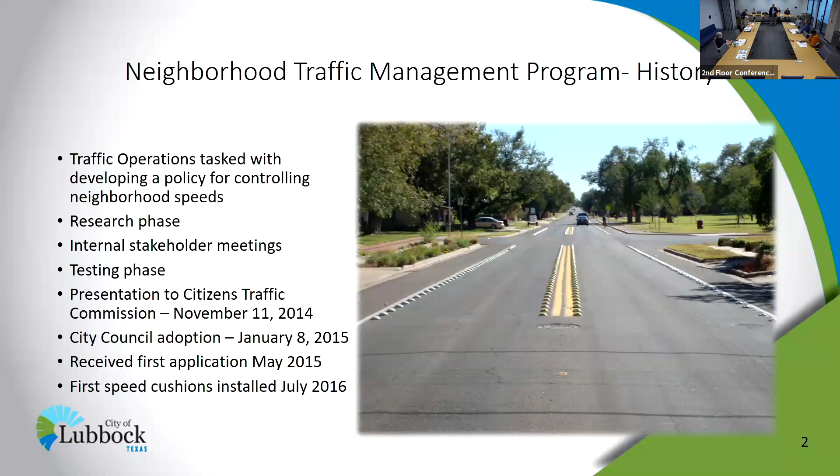It's an extensive packet. It's not just speed cushions. It's a variety of different tools that we can install for both neighborhood streets, alleys, and then also arterial and collector type streets. We received our first application for the program in 2015, and actually did our first speed cushion install in July of 2016.

So we talked a little about traffic calming devices. What is a traffic calming device? We consider that a device that's a physical object that self-enforces a certain driver behavior. If you think of a median in your way, it will prevent you from turning, whereas if you just place a sign in a spot, you're still physically allowed to turn, but just advised not to. So we were looking for physical objects that would deter speeds. Something that would not inflict damage to vehicles, and something that also allows drivers to maintain control.

So in other words, you don't want to put a normal speed bump like you would see in some of the parking lots around town. We all have a parking lot where there's a speed bump that's kind of harsh to drive over and would be impossible to do at a normal speed going down a residential street. So we wanted something that would allow drivers to maintain control so they're not swerving wildly and present other issues to us.

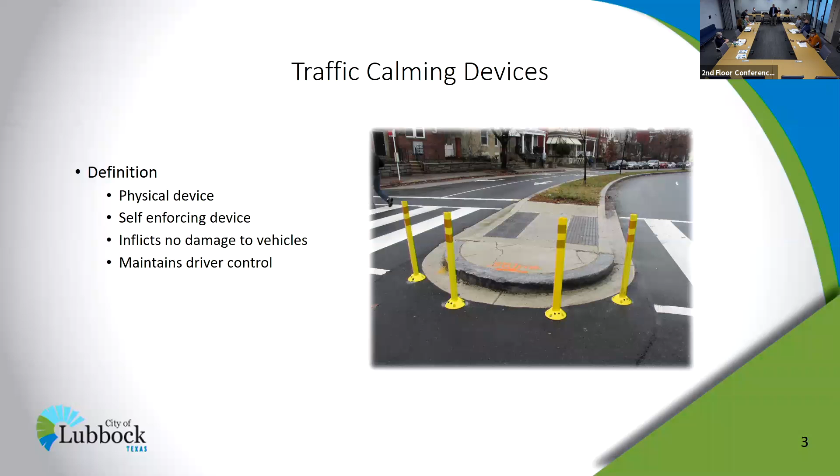So we settled in on, like I said, really 3 different areas of concern: alleys, neighborhood streets, and then collectors and arterials. For the next several slides, I'm going to go through and show you what our program offers for each of those scenarios. So for alleys, all we offer are speed bumps. This is a prefabricated device that we order and just bolt down to an alley. It has to be a concrete alley, which is where we have the issues with speeding typically. If you have a dirt alley, usually the nature of the alley maintains speeds on its own.

So it's pre-constructed from recycled rubber. It's a really hard material. We try to install them 300 to 600 feet apart. That depends on where dumpsters are, where possible access to driveways exists, and that sort of thing. So sometimes that range isn't completely met. That's what we strive for, though. These devices work, as you can think of going over in parking lots where you have a speed bump, people slow down. They have a great cost to benefit ratio. They're very effective in slowing down traffic. We've actually installed these in 2 different alleys currently.

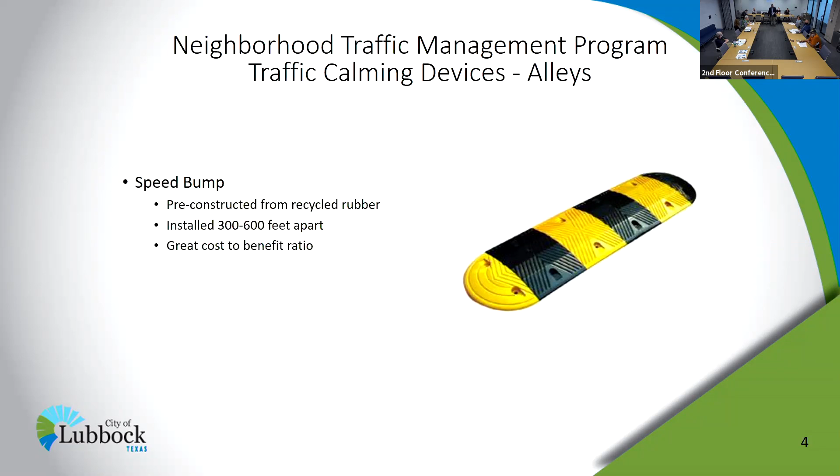Next we have these devices that help maintain speeds on residential streets. These are available to streets that have houses that front them, so not the sides of houses, within neighborhoods. The first one I'm going to talk about is a speed cushion. This is actually a picture from 13th Street west of Quaker. This was one of the very first installs we did. As you can see, it's not like you may have seen in other cities where we have speed cushion all the way across the road. It is in sections, but they're installed in such a way that they can't be avoided.

The sections help both with cost, but also they help out aspects of the street, such as street water flow, drainage. The large fire trucks and large vehicles can actually straddle them. A normal car, if you try to go between them, you get a tire on one side or the other. So they're very effective in slowing down speed. The way we install them with sections, bicycles and pedestrians, possibly joggers, can easily get around them. And similar to the speed bumps, they have a great cost to benefit ratio.

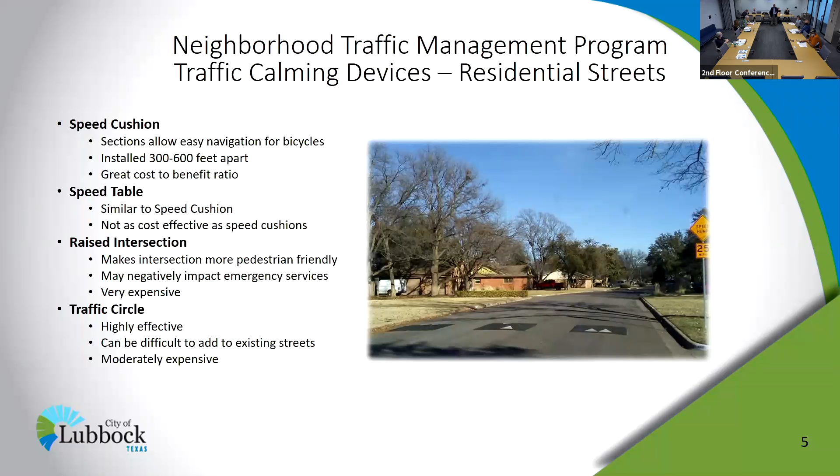There's a short flat section at the top. So that's what allows vehicles to go a normal speed down a residential street. So going back to the speed tables, again, they're very similar to a speed cushion, just a wider flat portion at the top. They're not as cost effective as speed cushions. They do the job about as well based on other cities' data, but they are more expensive than speed cushions. So really, speed cushion, in my opinion, is a better option just because we can put more out there for the same cost.

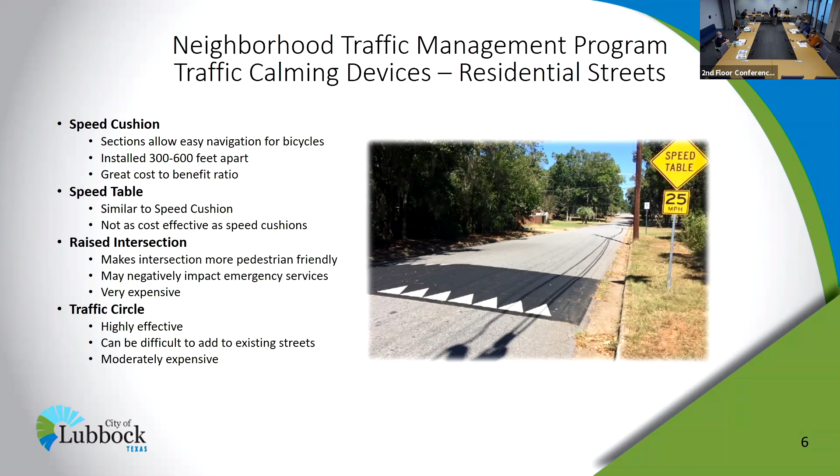It can negatively impact emergency services. In other words, they can't straddle this. They're going to go over it one way or another. It's going to slow them down. So another point is they are very costly. So this is an option we have in our packet, but we do not have any of these installed.

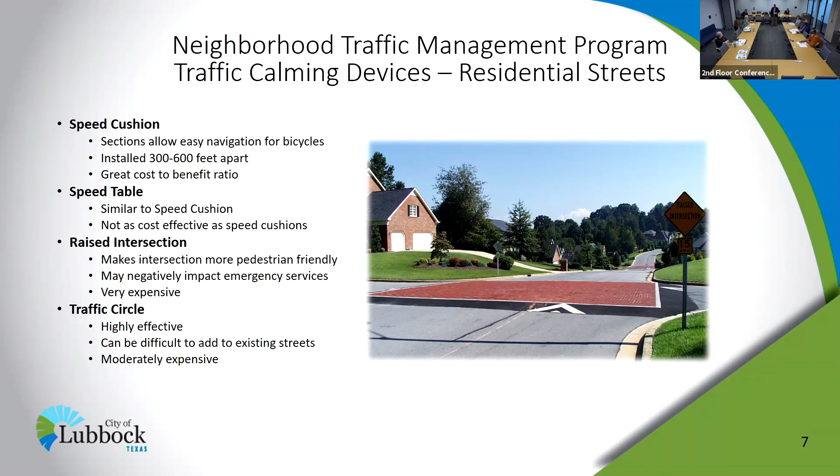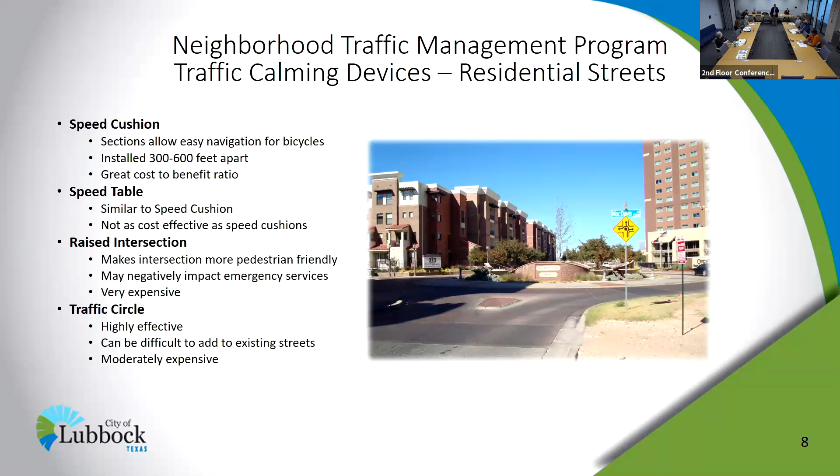They can be difficult to retrofit existing intersections just because if you look at the geometry of this, the corners have been shaped in such a way that allows traffic to smoothly go around it. And in a normal neighborhood, that would require land acquisition, that sort of thing. So it's not always easy to retrofit. It can be done, not always easy. And depending on the size, shape, and design, they can be moderately expensive.

So next, we're going to look at our options for collector and arterial streets. And so we use the word collector street in many different ways in our department, and in these meetings, I know we've talked about collector streets in the past. As our packet terms collector streets, it's a street within a neighborhood that has houses whose sides butt up to the street. So typically around town, those are going to be north-south collectors. Not always the case, but just in a typical neighborhood, that's what it is.

So the first option we have for these sorts of streets is a median. We're all familiar with medians. They may result in the reduction of speed and traffic noise. Usually speed and noise are coupled together as we think about it in a neighborhood. The way that they reduce speed is they narrow the lanes. And so it feels more narrow for a vehicle, so it typically slows down speeds.

Similar to traffic circles, the effectiveness of these devices depends on the design. So we've seen them installed all around town, anywhere from 15 to 20 feet wide or greater, down to 12 to 18 inches wide. And the effectiveness depends on the length of the median as well. So they come in all different sizes and options.

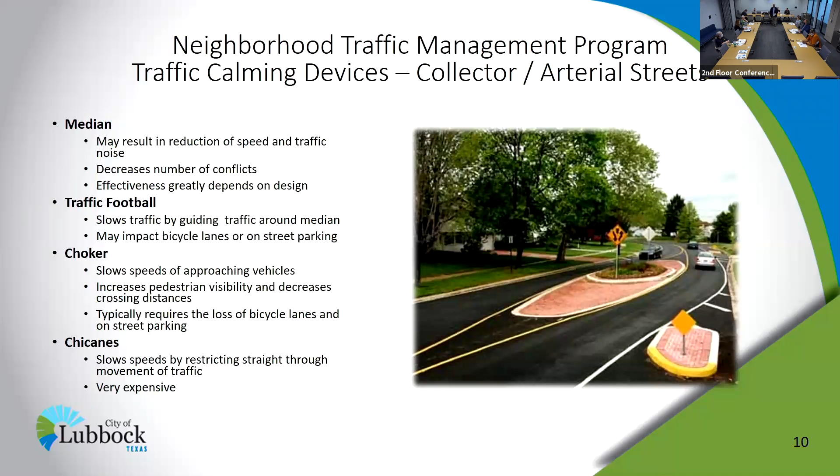Next, we're looking at a traffic football, is what this is called. Probably see why it's called a football. So this is essentially a median that doesn't extend very far. So it's a shaped median. It slows traffic by just guiding it around the football, if you will. Again, it slows traffic down by narrowing the width of the lanes. And it also makes the driver deflect, curve just a little as they go around it. We don't have anything that I would call a traffic football installed in town, but it is an option in our packet.

Another device that narrows the lanes is called a choker. So these are devices that are not installed for the full length of the street, just sections that narrow down the lanes again. Instead of putting them in the middle of the street, we put them on the sides. Definitely slows down vehicles. The negative aspects of putting something on the sides of the street is that it can take away bicycle lanes, possible parking options, that sort of thing.

It does increase pedestrian visibility. So in other words, if you can picture a pedestrian in this, for example for pedestrian crossing, because there are no ramps, but if there was a pedestrian there, the pedestrian would be in front of a driver approaching the section that sticks out in the roadway. So the driver would see a pedestrian a little easier. And it also decreases the amount of street width the pedestrian has to cross. So it's safer for pedestrians for a couple of reasons.

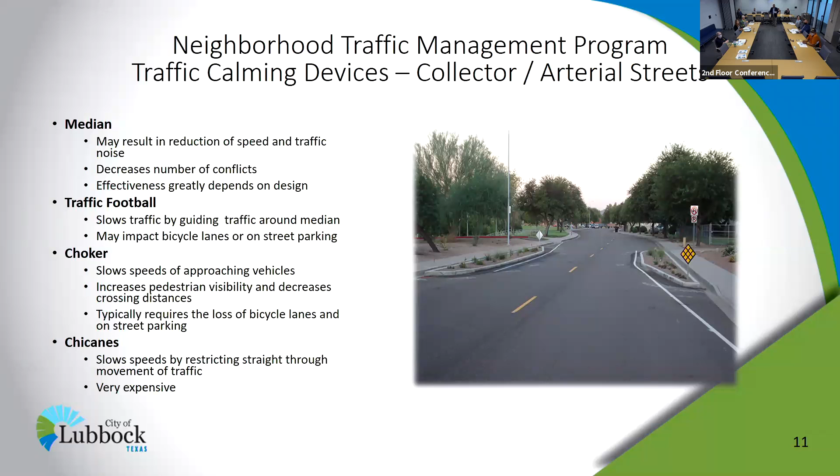Next, we're going to talk about chicanes. So a chicane basically is a device that makes a street snake. It slows down vehicles by making them turn every now and then. So they're little small curves installed into a street. These devices are more effective installed with development. So in other words, on the front end as a street is being created, if you create a street that curves, you can usually have more control as far as the amount of curvature, and it's just a better setup than installing something like this out into the street.

So these can be very expensive. If you think of a choker or a traffic football type installation, that's just in one spot. This continues for a segment, for a stretch of road. So it can be costly depending on the design.

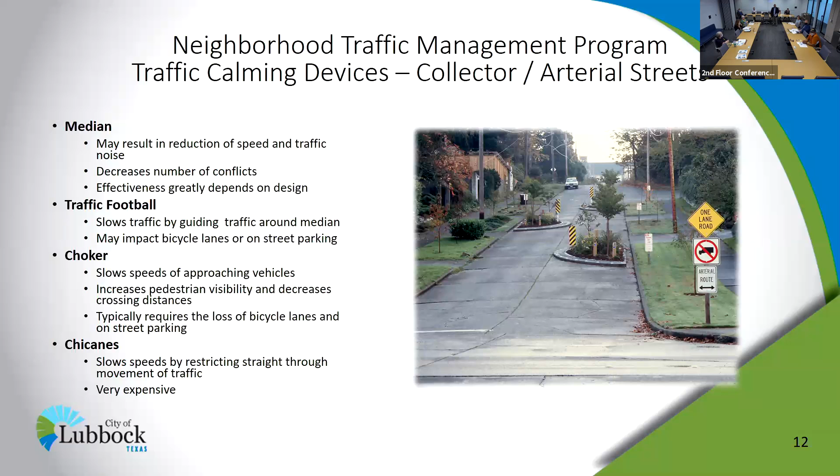Next, we're talking about diverters, or what you call a half closure. So basically, this is just a median that cuts across an intersection catty corner, forcing traffic to turn at the intersection. It decreases the number of conflict points because folks are not turning in front of straight through traffic. And it can increase pedestrian safety. Not in this picture, but if designed correctly, it gives them a spot to cross in the middle of the intersection. Again, it restricts through traffic, which means it could increase travel times, which again may negatively impact emergency services.

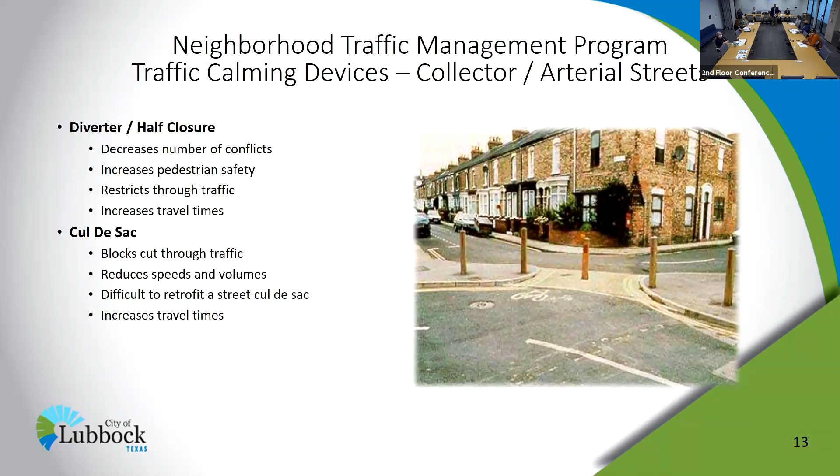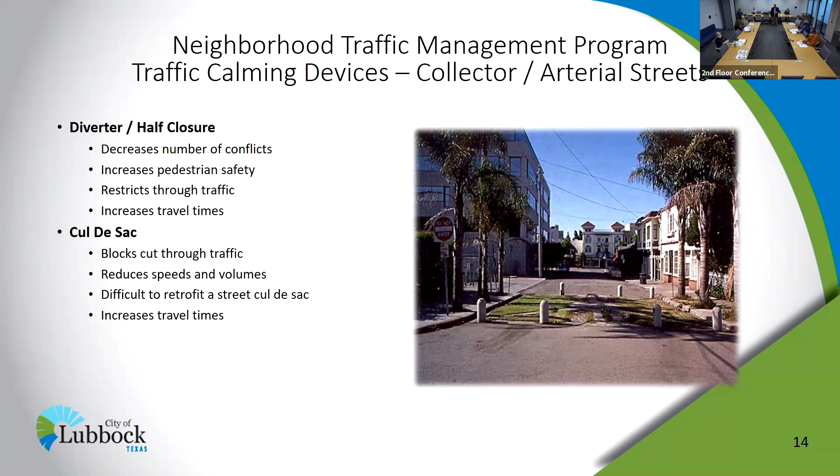So those are diverters. And then next we have a cul-de-sac. Everybody knows what a cul-de-sac is. It blocks through traffic, similar to a diverter. Definitely reduces speeds and volumes. It's difficult to retrofit an existing street with a cul-de-sac. When a cul-de-sac is normally designed, there's a radius that goes onto what would normally be private property in an existing street setup. So it's difficult to design a cul-de-sac after the street's already been built. And again, by blocking cut-through traffic, it does increase travel times.

So those are the different devices we offer as a part of the program. Again, really at this point, we've only installed two of those just because we focused on the neighborhoods, which was the main purpose of this. We wanted to give the toolbox for many different streets, but focus on neighborhood speeds, which is where most of our citizen requests about speeding come from.

So what is the process involved to get something like a speed cushion or a speed bump installed? Like I said, we have the neighborhood traffic management program. This is a packet we have online that we frequently mail and email to folks that have questions about the program. Now that we have several installations out there, people see them driving around and think, hey, how can I get that installed on my street? So news is kind of getting out. The number of requests has definitely picked up as we progress through the years. To get it started, there's a short application somebody would have to fill out that basically just addresses their contact information and the area of concern.

Once we receive that, we do a speed study on that section of roadway. We'll put the rubber count tubes out there, we set them out for a 24-hour period, we collect them, and we collect the 85th percentile speeds from those devices. Going back to other meetings in the past, we set speed limits with information such as the 85th percentile, so that's why that's important in this case. If the 85th percentile speeds in either direction are above 35 miles an hour, the city views that as a speeding issue on a residential street where speed limits are 30 miles an hour. If that is the case, the street is eligible for city funding of possible speed cushions.

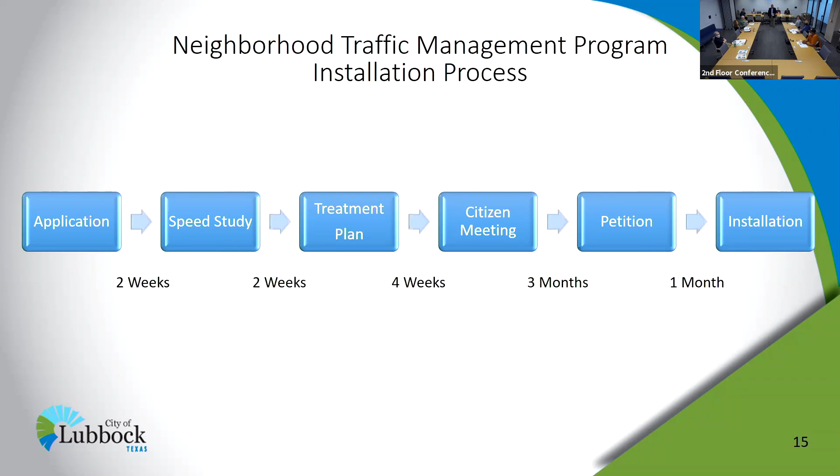And to clarify, 58th Street, this section is between Indiana and Memphis. There were a lot of vehicles, there still are a lot of vehicles that use that street. So when we get calls, most people who have seen them see them on 58th Street. It's a highly visible section of roadway. So yeah, we've done a great job at dropping speeds and volumes.

It's hard to know for sure. Our speculation is the vehicles that are not using that are cut-through traffic. Typically cut-through traffic speeds because they're going to the other side of the neighborhood. They don't live on that street. So we're accomplishing two things there. They're both positive.

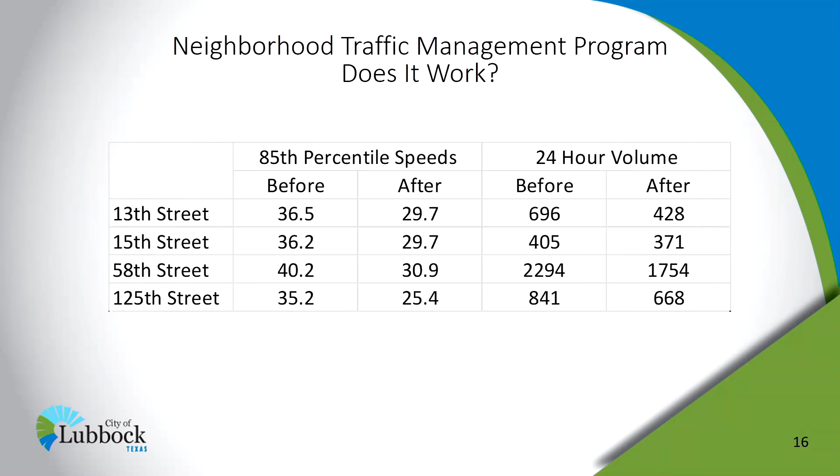That device is in the appendix. But yeah, definitely. I'd be interested to see what speeds we are seeing there. Yeah, I'm just curious. I didn't know if these were done. Like I said, right after you put them in, they were great. I mean, they're still great. I think over a prolonged period people are getting used to them, and now speeds are back up and they're just flying over them like they're not even there. All right, well, thank you.

So, 5 years into the program, what are some lessons we've learned? It's easy to do your research on the front end and think this is perfect, we're going to move forward. After you use it for a little while, you see some ways we can make it better. One of the things I've identified is to decrease the number of options available. Raised intersections and speed tables are both costly options that are similar to traffic circles and speed cushions. We have traffic circles and speed cushions implemented both by development and after the fact by various departments throughout the city. So why not just focus on those? If a raised intersection is too costly to install, maybe we should remove it from the package.

Another thing I'd like to look into is to better define residential streets. On the front end, the definition of a residential street was a home in a neighborhood that fronts that street. And if the side of the home was to the street, as you'll recall, that's what we termed a collector street. What we didn't anticipate is streets that have homes that both front and side to it, and we've stumbled across several. So, create a better definition of a residential street as it relates to these speed devices.

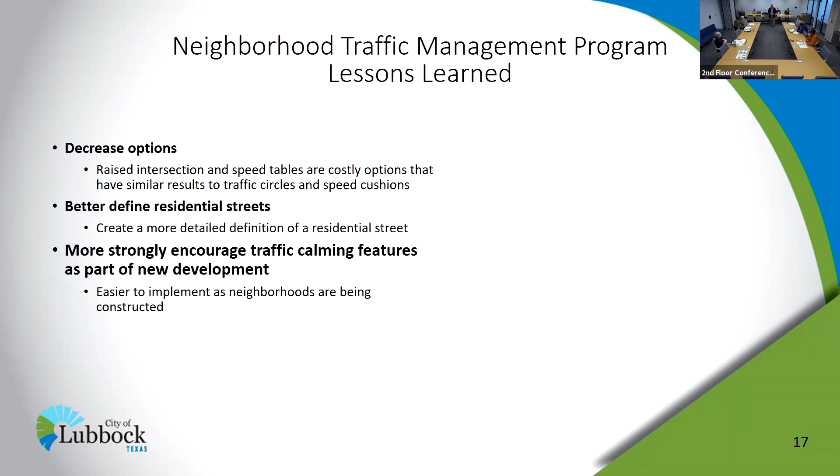And also, like you mentioned earlier, we want to more strongly encourage traffic calming features as part of development. That's definitely a time to address it. It's easier to implement, it's cheaper to implement, and it typically makes the neighborhood more appealing to residents if you can build a neighborhood where speeds are under control. So that's something we'd like to push a little stronger. With that, do you have any questions? Hopefully that was a plethora of information as promised by Charlene. Great information.

One thing I was going to mention, and David can go into it more, is that we plan to bring our revised NTMP back to this group. Did you already mention that? I did not. Probably in October, maybe November, and then take it back to City Council to be reapproved with a few changes that you would approve. So that's the time frame. Any other questions? I know that wasn't a question.

I have one question. It's kind of a chicken or the egg question. How often does a person put an application in, you do all your studies, and then the majority of the neighborhood says no, we absolutely don't want that, and you spent all that time? Do you ask when they apply whether they've spoken with any of their neighbors, whether there's any discussion within the neighborhood, to save you time if you knew beforehand that people wanted it? But then you don't know if it's going to be effective until you go out and do the study. Mm-hmm.

So, we have had those situations. And it's our train of thought that we continue through the steps and see how it turns out, because it does take staff time. However, we don't want to be the ones to deny it.

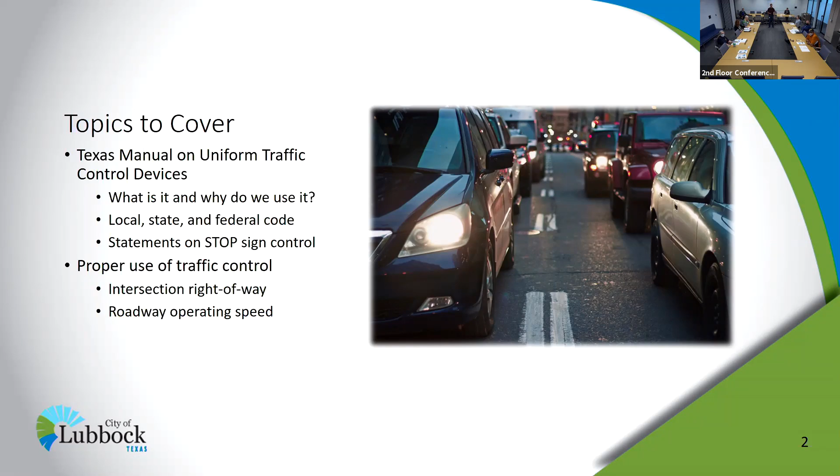And then we'll talk about the proper use of traffic control, such as at intersections to assign right of way, or in those sections of roadway that are not at an intersection where you see the operating speeds. So this is the TMUTCD. This is the Texas version of the federal MUTCD. So there are about 7 or 8 states that adopt a state version of the federal manual. The rest of the states just adopt the federal manual.

Really the differences are pretty minor. Texas takes out a lot of stuff that's in the federal manual and then adds a little bit. California adds a ton of stuff that's not in the federal manual. But basically you have to just generally comply with the federal manual, but you're allowed to make some changes here and there. This guides engineers in the proper application of traffic control devices. We'll get into why that's important.

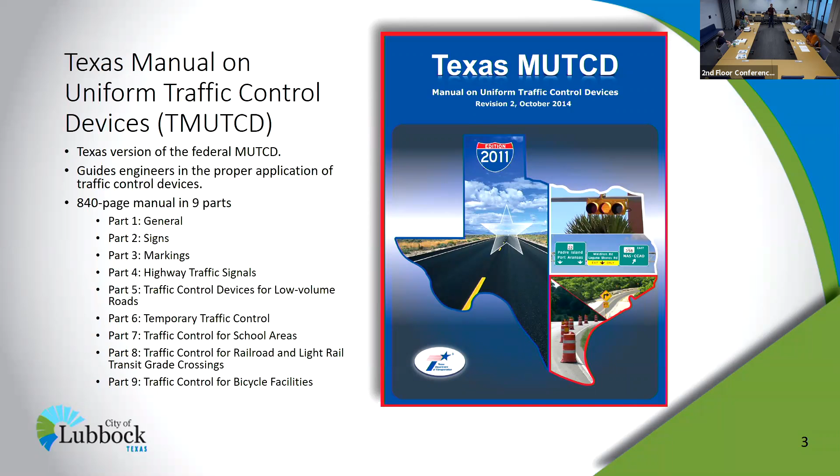And then it's an 840-page manual in 9 parts. So not a real good read. If you have insomnia, it's pretty good for that. But we'll be talking about part 2, signs, because that's where stop signs are. But this also helps us in all other applications of traffic control devices, such as signals, rail crossings, that sort of thing. Temporary traffic control, that's big.

A little bit of the history of the MUTCD. So this was not some federal mandate that just came about in the last 10 years or 20 years. It actually started in the early 1900s. So the first center line was painted in Michigan in 1911, and then the first traffic signal in 1914, first stop sign, 1915, and then the first official route signs as a part of a maintenance function, 1918,

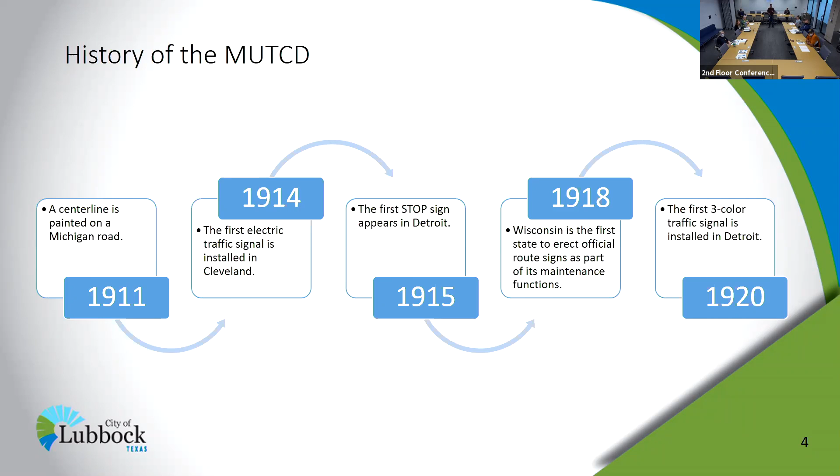three-color traffic signal, 1920, and then post-World War I, World War II, when the country really started becoming mobile, you started seeing a lot of motoring groups and state and federal groups get together and say, we need to make this uniform so that if I drive from Texas to Nebraska, I don't see 10 different shapes of signs and 10 different colors of signs that all mean the same thing. And so the federal MUTCD was born in 1935 as a 166-page 4-part manual. So it has grown quite a bit since then.

So AASHTO, which is the American Association of State Highway and Transportation Officials, they are a big proponent of having uniform traffic control devices and uniform design throughout the country. And that way, as you drive from city to city, county to county, state to state, you expect that a speed limit sign is always a white rectangle with black text, that sort of thing. So why do we use it? Well, we just talked about that. Uniformity of traffic control devices ensures road users can travel between cities, states, and regions with ease.

The MUTCD standards are based on research, which is applied across the nation through Federal Highway. So before anything makes it in the manual, they test it. They don't test it in one city or two cities. They usually test it in tens of cities. And then there's an experimentation process that is formalized that if you want to try a new device out and it's never been in the manual before, you have to actually appeal to Federal Highway, and then it is a research-driven process. So there's before and after studies.

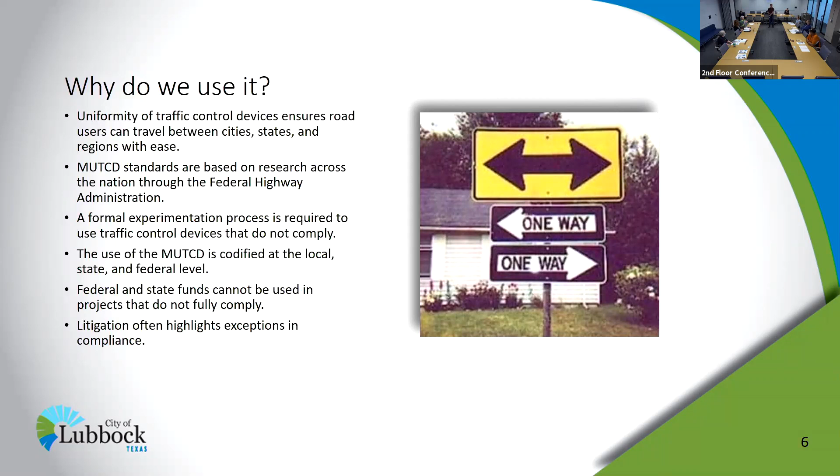And then another big thing is litigation often highlights exceptions in compliance. So if you have a major crash or you have a major incident, lawyers are going to be looking to see, did you apply the manual properly? Did you comply with all of the state and federal guidelines that are codified?

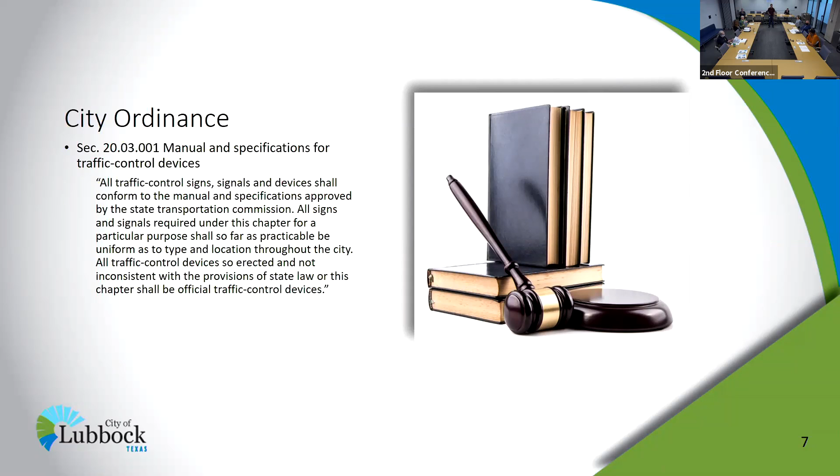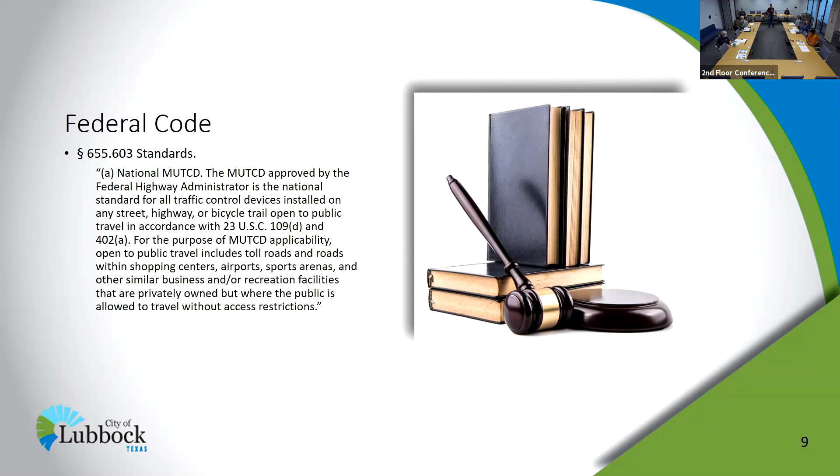So this is a city ordinance that has adopted a manual for specifications for traffic control devices. I'm not going to read all of these. I just want to let you know that it exists and it is in our code. And same thing for the state code. It's a little longer because it's the state level. And then same thing in federal code. So the federal is the only one that mentions the actual MUTCD. The other ones talk about a manual developed by AASHTO, but AASHTO has formally adopted MUTCD, so it's still codified.

Guidance, options, and support are lower level statements, but guidance is still the most restrictive non-standardized language. So basically, if it's in a guidance statement, you should do it unless you have a really good reason not to do it based on an engineering study or an engineering judgment. Most of the application of stop signs is guidance, but unless we go do a formal study that says, well, we can do an exception here, we should follow guidance.

Options and support are a little more open-ended. They just kind of tell you, here's different ways you can do things. Here's your different ways that you're allowed to put something or not something. Options are, it's kind of self-explanatory. You don't always have to put up something.

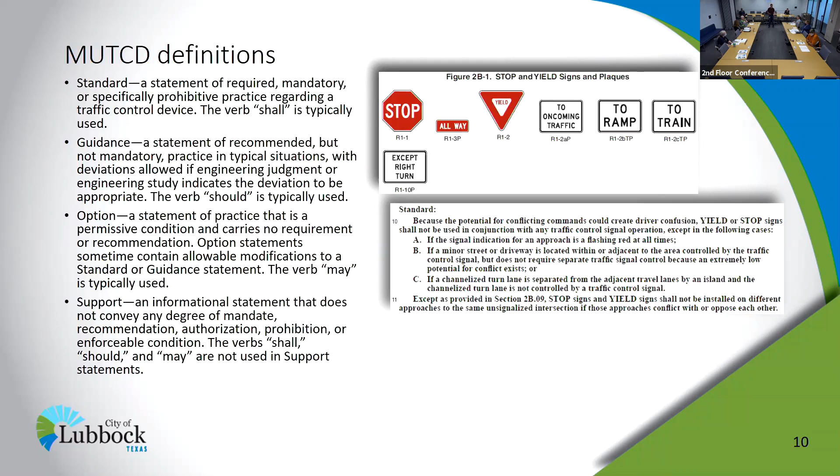So that tells me right away the manual doesn't want me to make people stop unnecessarily. It wants to keep traffic flowing, and it wants the necessary stops to be easy to see and easy to recognize. If I put a stop sign at every single intersection down the street, it's going to be really difficult for the driver to tell which ones of those have a high hazard and which ones of those are just like, well, maybe they're trying to slow me down. So that is why we don't use stop signs for speed control. We want the hazard or the situation that requires a full stop to be readily visible to the driver.

So if you can't see down the road, like a lot of the intersections downtown where you see an all-way stop, it's because you physically can't see down the road to see if someone's coming. So we stop all the vehicles coming into the intersection, and that way it's safe. And then crash records are kind of a reactive measure. If every year when we look at crashes we see a lot of crashes happening in the intersection, we're like, well, maybe we need to put some stop signs.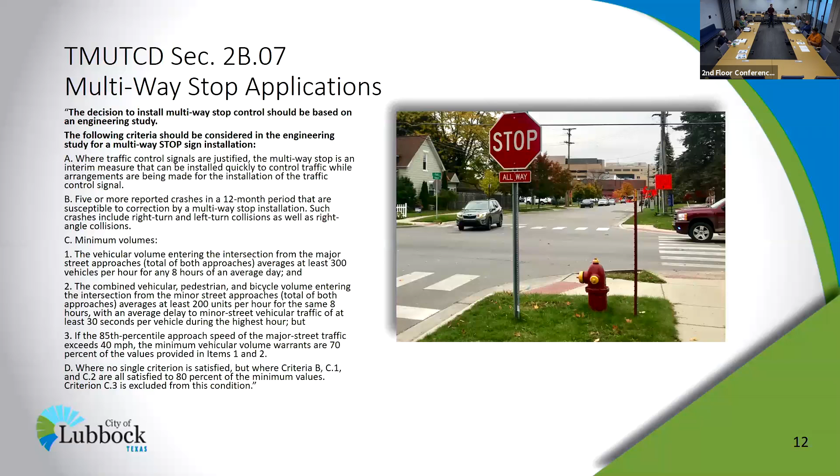So City of Lubbock typical applications, so through the planning process that we talked about in the design of neighborhoods, we usually install yield signs to control lower volume approaches to any uncontrolled four-legged intersection to minimize driver confusion. So Texas state law takes care of those intersections on a first come, first served basis. You're supposed to yield to anybody that's already there. But we do get complaints, and it is kind of a confusing situation because you can't always see all the way down the road. So if we get a citizen request, we automatically put up yield signs, we assign the right of way. That, again, does not require a full stop. So we are complying with the manual in that regard.

Stop sign applications are typically for any intersections that intersect with a roadway that functions as a collector or an arterial. So the arterial is obvious, like if you're coming up to an arterial, we want you to stop. That's a higher speed, higher volume roadway, you need to give way. Any roadway that functions as a collector could be any through street going through a neighborhood where we expect higher volumes and we expect more traffic. But we want to keep that traffic moving, and we don't want to stop them unnecessarily. So we put up stop signs on the side streets of those.

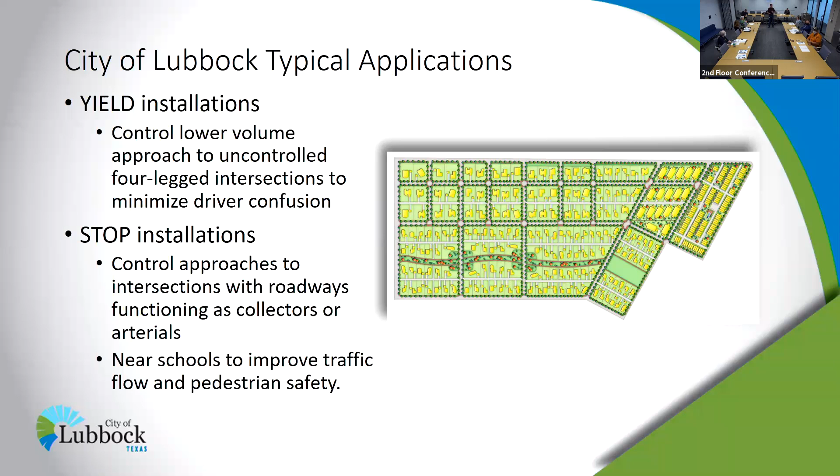And then also near schools to improve traffic flow and pedestrian safety. So if you've ever been near one of our neighborhood schools when they get in or out, it is a very congested, very busy situation. And so we do apply stop signs, all-way stops, at the corners of those schools in most situations to help kind of calm traffic, let the pedestrians get across, and generally keep things as organized as you can in that chaotic situation.

When it comes to an actual engineering study where we've had a stop sign request where we see crashes outside of our normal ranges, these are the things that we look at before we apply stop signs. So we go and we see how far can you see down the road. And the sight distance is a function of not only just how far you can see, but how fast is the traffic. So if it's a 40-mile-an-hour roadway, we need to be able to see further down the road to make our decision. We look at vehicular and pedestrian and bicycle volumes.

So generally, the higher the pedestrian volume, the easier it is to install a stop sign or a multi-way stop, because pedestrians take a longer time to cross the street. So it makes sense to stop the vehicles to give them a gap. And then left turn volume on single lane approaches.

So if we have a high left turn volume on a single lane approach and there are no stop signs, that one vehicle that wants to turn left can hold up a long line of vehicles behind it. And then that can result in unsafe behavior for drivers and also just a lot of delay in general. So we may apply an all-way stop in that situation so that that left turn driver only has to stop and then they get to go at the next moment.

And we always look at crash history. So anytime we see crashes at intersections, we know that we need more control. And we actually have a graduated approach. So there are some situations where in a neighborhood, we already have an all-way stop and we still see a high crash history.

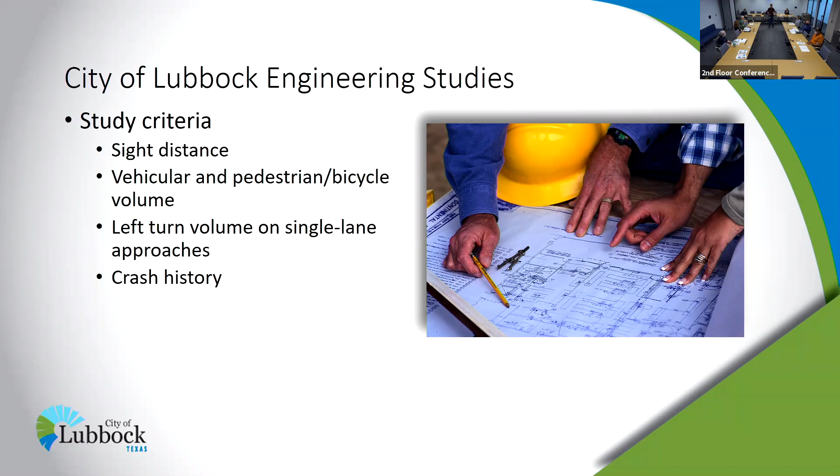Then we'll go in with stop ahead warnings or flashing stop signs or something like that. We try to keep treating the intersection until the problem is gone. So, potential all-way stop sign control problems.

So this photo shows you a pretty crazy example, but it highlights the problems that you can create by misapplying traffic control. So this would be an approach with an incredibly high volume on one leg, and at an all-way stop sign controlled intersection, the higher the volume on any given approach, the higher delay that approach will receive.

So if you have one leg of an intersection that has a really high volume and the others don't, because you're stopping every single vehicle, the lower volume approaches will see virtually no delay, and then the higher volume approach will see undue delay. And that is definitely not what we want to do when people are trying to go home in the afternoon. You know, we want to treat the traffic equally and keep it going. So let's talk about that.

Lower compliance is another issue that we'll run into. So stop sign installations that don't meet MUTCD criteria can lead to less respect for all stop signs. And you've seen drivers rolling past stop signs, potentially overlooking hazards. Well, we find that increases in areas where there are more and more stop signs.

And then also it reduces neighborhood quality of life. So vehicles stopping, idling, and accelerating create more noise in neighborhoods. Kind of as the flip of the coin, we don't want traffic going faster than the legal speed limit, but we also don't want it going really slow or accelerating or creating a lot of noise and pollution for the neighborhoods. Drivers tend to accelerate more quickly and achieve higher peak speeds when they're required to stop more often.

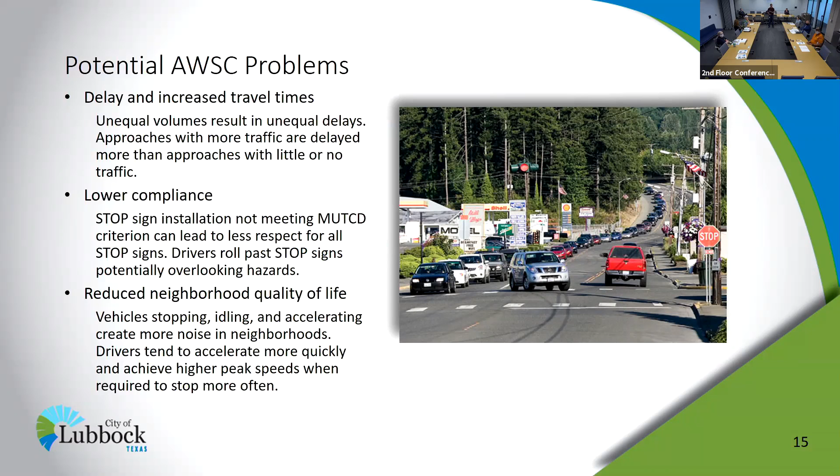And you've seen that if you go through like a parking lot and you see speed bumps, you may slow way down for that speed bump and then you might find yourself accelerating to make up for that lost time. Well, in a neighborhood, we would much rather just have a consistent normal speed. So proper use, this is text from the MUTCD: yield or stop signs should not be used for speed control.

I have a picture of a police car here because they are the ones that are going to both enforce the speed limit and enforce stop signs or yield signs. And they already have a hard enough job trying to take care of traffic everywhere else. We don't want to make their job even harder by the officer having to decide, well, do they really need to stop? Did they roll through that? You know, that sort of thing.

Safety concerns associated with multi-way stops include pedestrians, bicyclists, and all road users expecting other road users to stop. So we don't want to put up a multi-way stop sign installation unless drivers are going to expect everybody to be stopping. It just kind of makes sense at that point. Multi-way stop sign control is used where the volume of traffic on the intersecting roads is approximately equal. And that goes back to the volume to capacity ratios. We don't want to have undue delay on one approach.

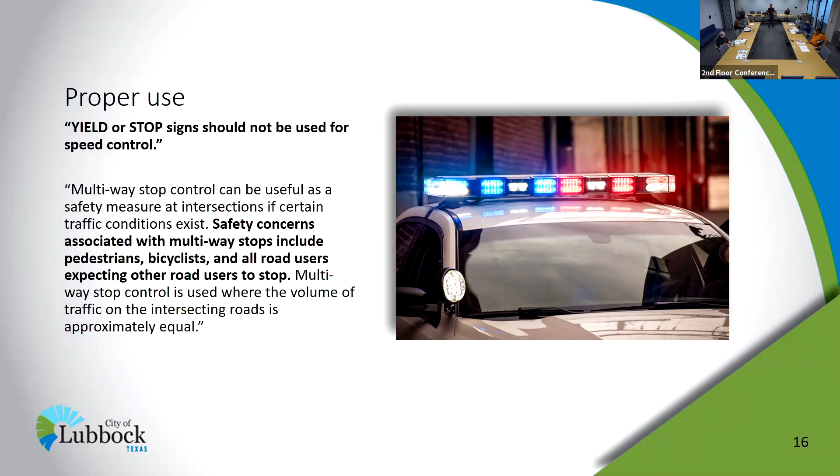So then this comes back to controlling operating speeds. We go back full circle. So if we're not supposed to use yield or stop signs to control operating speed, then what should we do? Well, a roadway's operating speed is largely a result of its design. Long stretches of relatively straight and wide roadway with few obstacles will result in higher vehicle speeds.

They are all 30, and then we raise the ones that we want to be higher. So if the street design does not match that 30-mile-an-hour statute set speed limit, we will see speeding. We just know it. So the best way to prevent speeding is to design neighborhood streets to constrain speed.

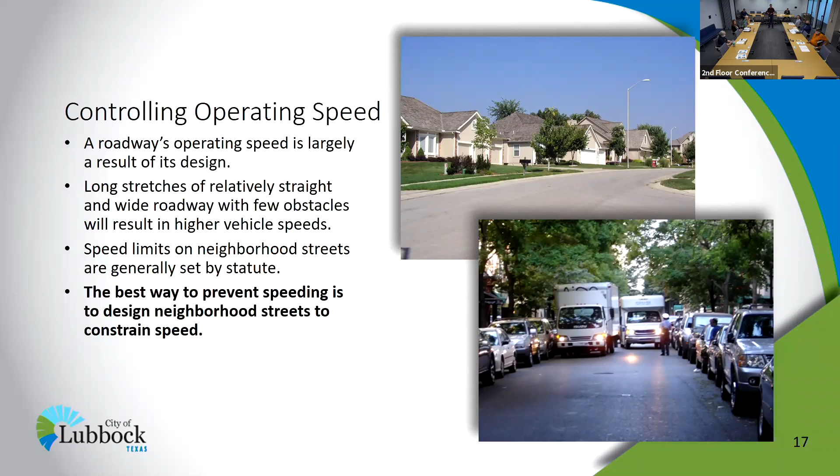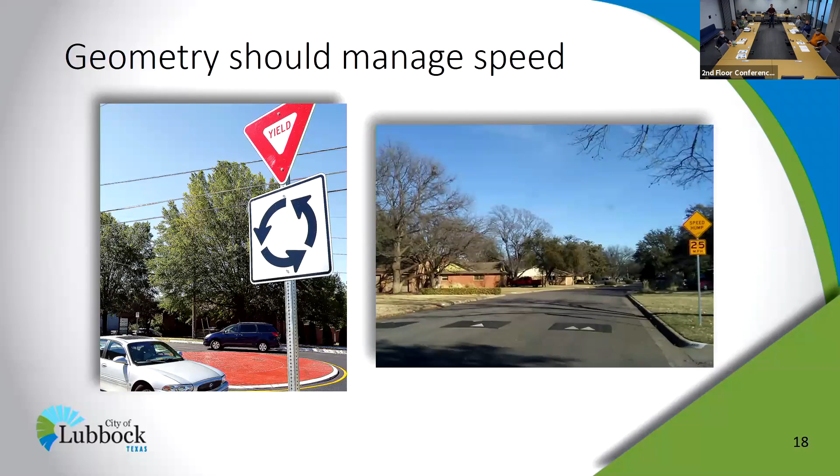And I'm past my wonderful questions. Does anybody have any questions? That's what he meant to say. Oh, two people are using the computer at once. Oh, David's trying to. Chase them out.